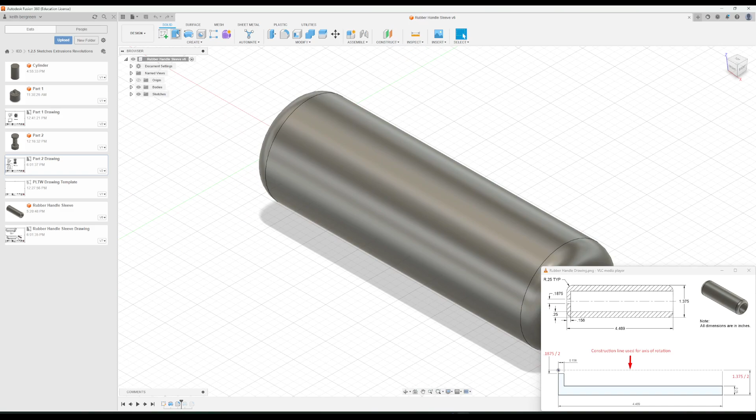I'm going to go up to File, New Design, then create a sketch on that front plane again.

First, notice that the dimensions here are all in inches, so go up to Document Settings and change that.

Essentially what we're going to be recreating is this sketch right here, which represents the bottom of the rubber handle, just this portion of it, not the top.

I'm going to be drawing the center construction line, which is this dashed line, essentially the center line of the handle in that drawing.

We're going to go up to the line tool, and in the sketch palette, check construction to make our line type a construction line. I'll click on the origin, then drag my mouse out the full length of this sleeve, which is 4.469, and press enter.

Make sure you uncheck the construction line type - we're not going to be using that anymore.

Now we're going to be drawing this profile right here, which is actually not connected to this construction line - there's a little bit of space right here. So we're just basically going to draw this little L shape using the line tool.

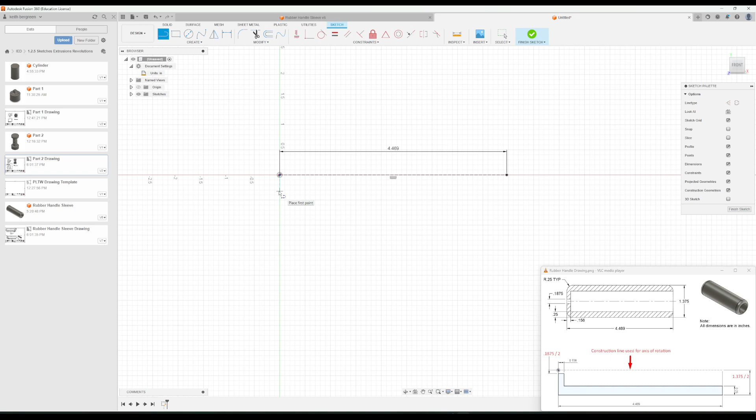I'm going to move my mouse over top of the origin, but not click, then move down a little bit and roughly sketch this profile. When I get to here, I'll move my mouse up, not click, drag it down and make sure my line is straight and perpendicular - make sure you're seeing the 90-degree symbol, then click.

Just make sure again your lines are perpendicular, go back. Don't worry too much about length or anything, because we're going to add dimensions.

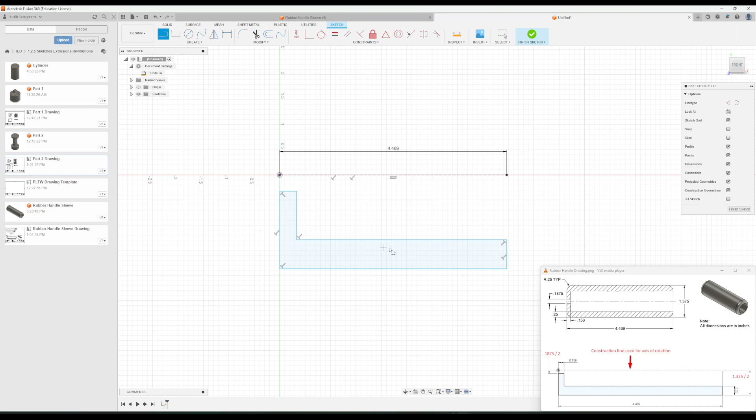When you get to this part, move your mouse over to this point, don't click, then drag it back over, make sure it's perpendicular, see 90 degrees, click, and reconnect it. Make sure all these lines are straight when you're done with this step.

Now that we have our basic profile, we're going to add some dimensions. I'll click the dimension tool, and first this dimension right here needs to be set.

This needs to be 0.156, so go ahead and change it to 0.156.

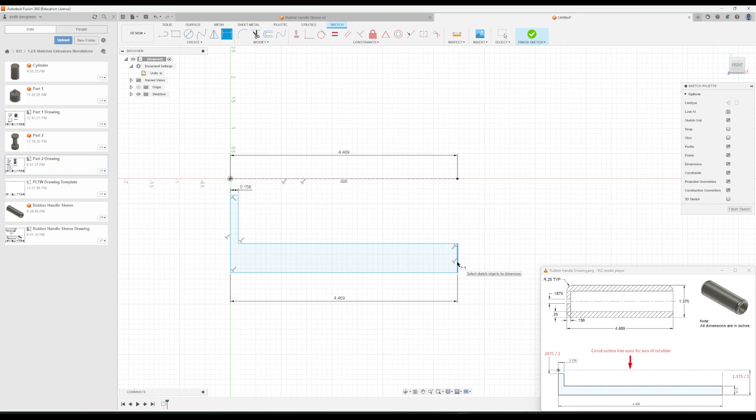This one also needs to be 4.469 - it is, so I'll just press enter. This one needs to be 0.25.

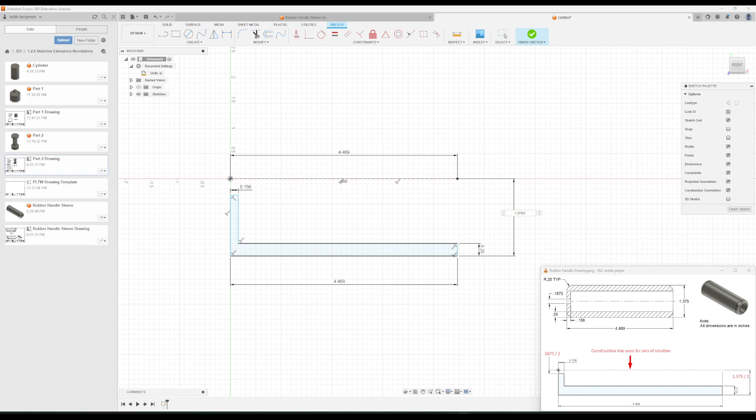The distance from this bottom line to this one needs to be 1.375 divided by 2, because you'll notice this full distance is 1.375, so the distance from here to here is half of that. I'll click on this bottom line, click on the construction line, and instead of doing that math in my head, I'll just type 1.375 and put /2, and Fusion 360 can do that calculation. There, it came up with that.

The next one we need is this distance right here, so zoom in for that. Click on the origin, click on this point or line here, and that needs to be 0.1875 divided by 2, because this little hole in the opening of the rubber handle has a diameter of 0.1875, so we just need half of that. I'll type 0.1875/2, enter.

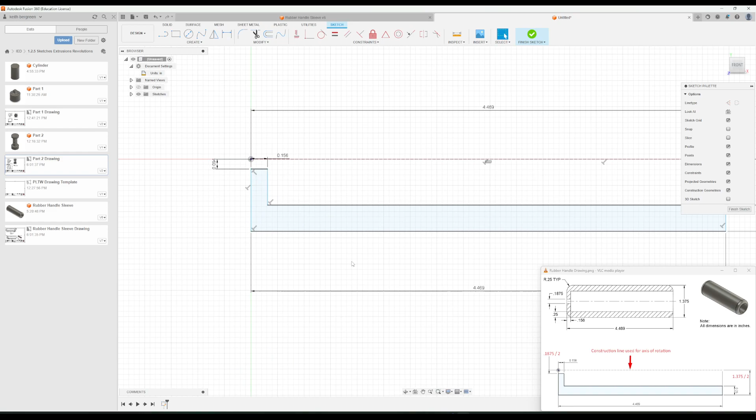You'll notice that I can slide my sketch side to side here, so we want to make sure that this line is lined up with this. I'm going to use a constraint for that - I'll click on the one called coincident, click on this line and then that point, and that will force it to be lined up.

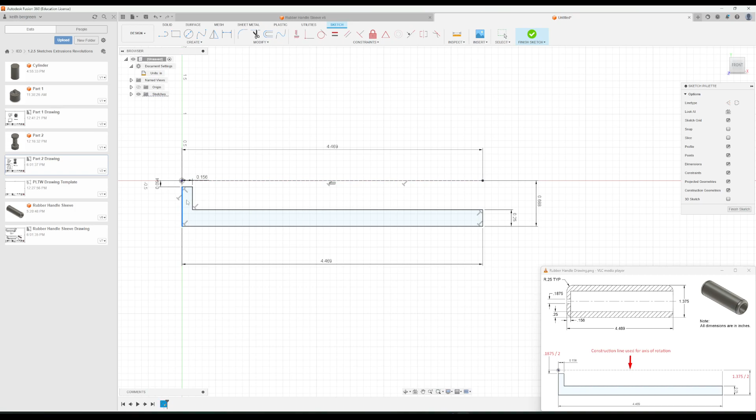Now I have nothing but black lines on my sketch, which means everything is locked in and I can't move or change anything. Go ahead and finish the sketch.

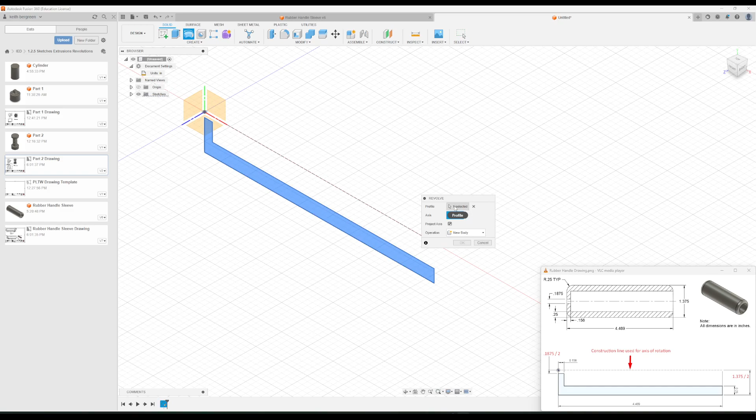Home, and we're just going to revolve this. I'll click on the revolve tool, and it automatically selected the profile, but we need to select the axis - this time we're clicking on the center of it for the axis. That is basically going to make the base of our rubber handle.

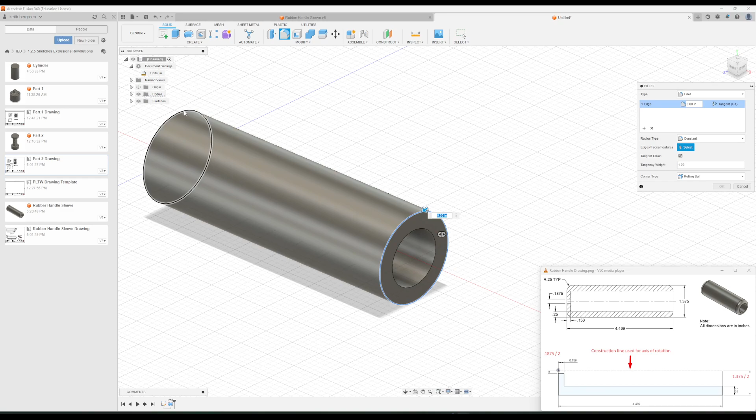Click OK. One other thing we need to add is you'll notice there's a round for this outer edge and this outer edge of 0.25. I'll go up to fillet, click on this edge as well as this one over here, and change that to 0.25, which rounds both of those edges. Click OK, and that is how you create the rubber handle.

You can just go up here to save, or type in rubber handle and save that.